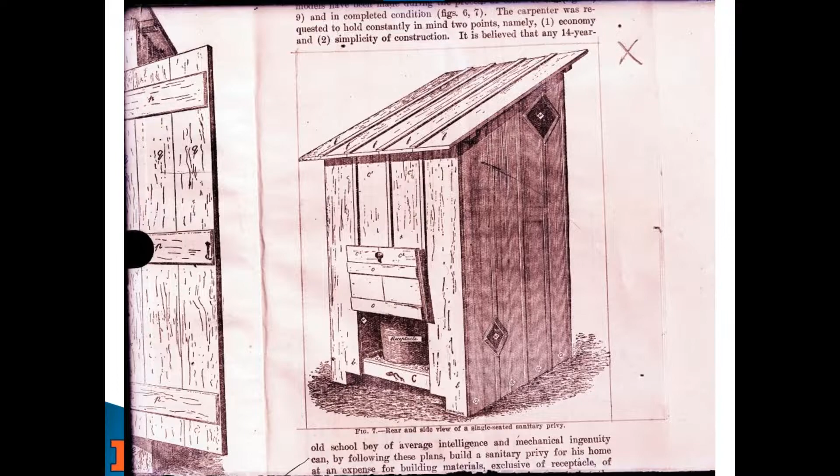So this is the state of the science for a home in a rural area back in the day. This is from the early 1910s, I believe, and it's taken out of a book and put on a glass plate to share with folks whenever our scientists went out and gave talks and things like that.

So we're going to talk about septic systems today. It's a wastewater treatment system, called an on-site system or decentralized system, and like anything else it has to be managed and maintained. They rely on natural degradation by bacteria in our body that gets into the septic tank and breaks down all the material, so it can then infiltrate through a conventional system through a septic field and percolate down into the natural groundwater system through the soil. It's further broken down there in the soil and rendered harmless, as long as we do things the right way.

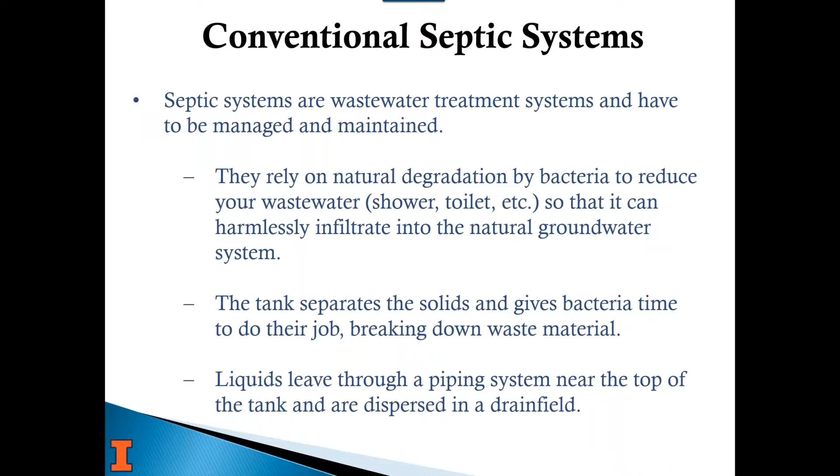So what the tank does is it separates the solids. They drop to the bottom or float on top, which also gives the bacteria time to build up and do their job by breaking down the waste. Then the water that separates can go out into the septic field. So that's really a simple mechanical system that works really well on its own. A properly taken care of system that doesn't get clogged and doesn't have chemicals and things in it can last for a very long time. Sorry for the poor image here.

I meant to change this, but this is a 2-compartment septic tank. You can see on the left, the PVC pipe that comes in from the far left goes into the first tank. All the solids drop out. There's some solids that are lighter than water, they float. Then there's a baffle to get to the second tank, and then the cleaner water, without the solids in it, goes out through the perforated pipe. As more water comes in, it pushes more water out.

Once it gets to the soil, at the soil absorption field, or leach field, it just goes into the gravel and down into the ground. It's just like other infiltration of water. When it rains or anything else, it eventually gets down into the water table or moves off site. So again, it's a really simple system.

Those solids, though, certainly build up. And that's why you have those intakes at the top, so that you can open your tank and pump it when it needs it.

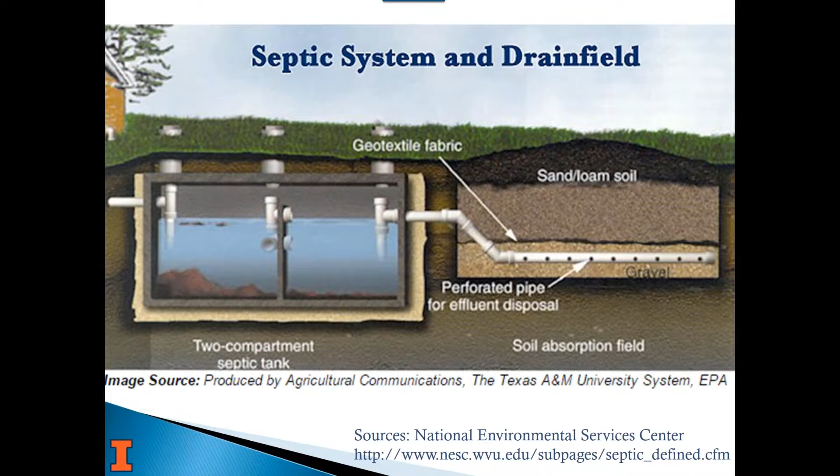Here's another diagram showing a single tank with a riser. So the sludge is on the bottom, and then it goes out into one of two kinds of absorption fields shown here. One is a trench design that's not completely sand or crushed gravel or rock, and the other shows where the whole area was excavated and filled in with coarser material that allows percolation and water to move down through it.

It says here there are over 25 million homes that have septic systems or on-site wastewater systems in the U.S. That number is probably low.

The EPA just completed some work this last year to identify private wells in the country, and we now believe there are 23 million private wells in the country. Usually we know there are more septic systems than private wells, so there's likely over 30 million septic systems.

If that's the case, without any information to back that up, there's likely to be more than what we are saying here, and that was the old number, so to speak.

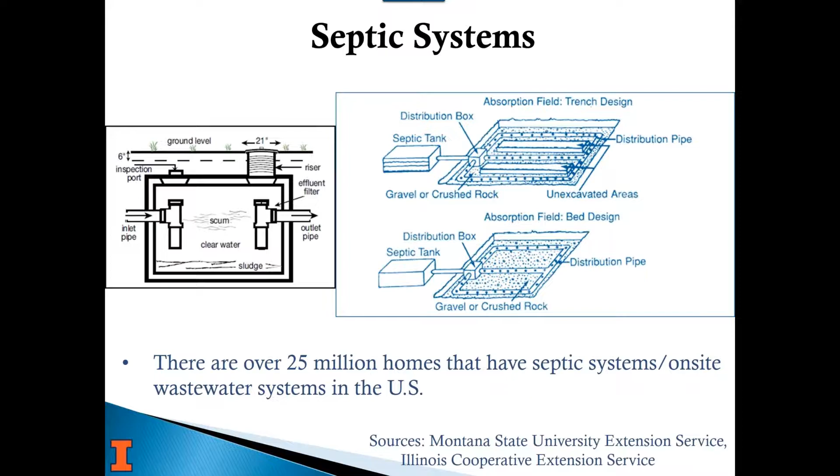Septic systems will fail if you don't pump them, and they clog up, so the water can't flow. You'll see the area around your tank or your drain field have really green grass. It may be soft when you step on it because there's water under the surface, or it may actually form a pool of water or waste in your yard, somewhere along the line between where it comes out of the house and goes into your drain field. You will notice a smell, and worst case, it can back up in your house, and that does happen.

So the thing to do is take care of your tank. I hear from people all the time saying, 'I've lived here for 25 years and we've never done anything.' My response is usually just wait, because eventually, if you're not pumping your tank, the solids are going to build up and it's going to clog up your system. There's no doubt about that.

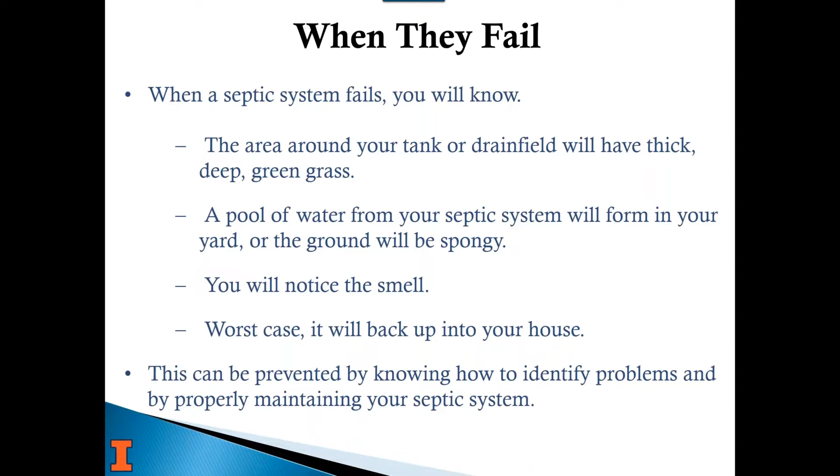As far as sizing and design, it's really based on the number of people. In Massachusetts, it's based on the number of bedrooms for a house, because homes do sell, so you can't base it just on the number of people, but in theory, the number of people that might live there. The more people, the bigger the tank, or the more frequently you have to pump. I'll show you a diagram in a minute of one example that the National Environmental Services Center provides.

Really, it's about public health protection. We have a lot of regulations in most states about where your septic system can go, which side of the home it should be on based on flow direction in the ground, all of those things, because the biggest risk is to your well.

It's no different than a feedlot for livestock. If it's too close to your well, especially if your well is shallow, there's more potential for that effluent to move to your well when you start pumping, because you're lowering the pressure of the water near your well, and that makes water flow towards it. So it's important from the public health side.

And then maintenance—many septic system owners don't know what they need to do to take care of their septic system, and hopefully we'll give you some of that information today.

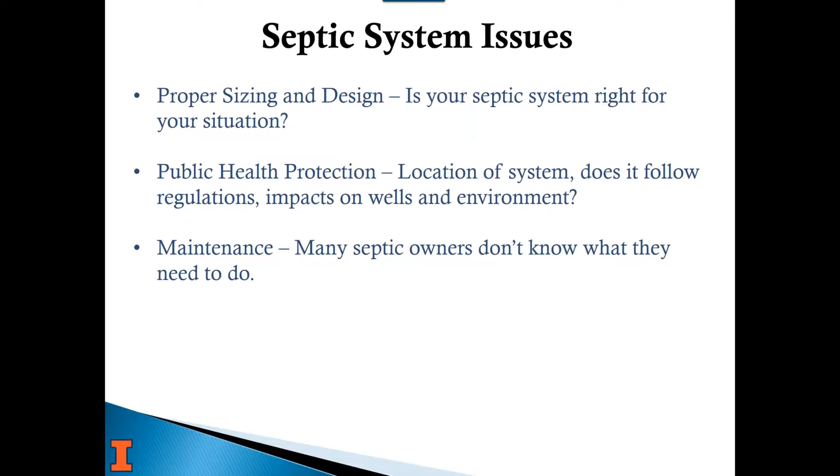As far as sizing and design, all of that matters based on how often you should pump your tank to remove the solids. Also, the size of the drain field matters depending on what kind of water use you have. It needs to be properly sized, or it won't be able to handle it. If your tank is undersized and you're putting more water through, it doesn't give bacteria time to do its job.

It's important to minimize flow into your tank so the bacteria can work on the material that's there longer. That doesn't mean you have to conserve water, but you should avoid things like a constant flow through your septic system.

As far as older systems, in the old days sometimes they just ran a line straight to a field tile or straight to a stream instead of to a leach field, and we still see those. You can be canoeing on a small creek and see pipes sticking out of a bank, which is totally illegal. There's not a lot of wherewithal with most state agencies to enforce things at that level, just because there's not enough staff, so some of those don't get taken care of.

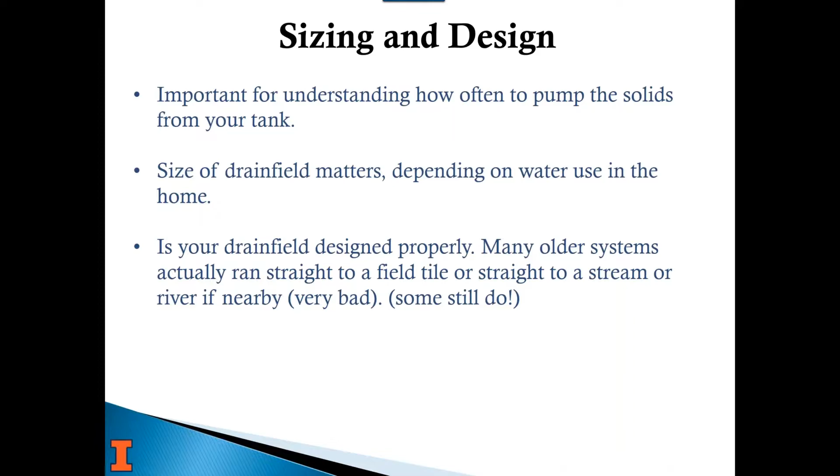As far as public health goes, if you have a straight pipe to a ditch or to the surface somewhere, it's illegal in most states, and I think it's illegal everywhere now through the US EPA. But it's also just really harmful to the environment—not only could it be a public health issue for a person, but also for the ecology and the waste in a stream, all that sort of stuff.

Understanding the groundwater flow direction is important to understanding which way things are moving from your leach field. Most of the time it's a shallow system, very shallow, so it's the water table that's also helping move water through the ground in a really shallow system.

Most of the time, the water table follows the land surface. So if you're in a subdivision that has a high end on one side and a low end near a stream, most likely flow is from the high end to the low end. If you're the house up on the hill, everything's flowing downhill from you. But if you're the last house before the stream, the shallow water table is probably flowing past all your neighbors first towards you.

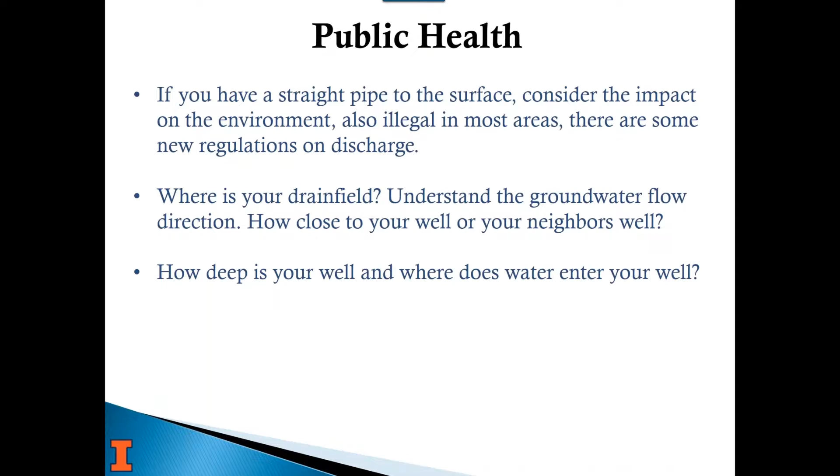So it's really important to understand what type of well you have. If it's a really shallow or a dug or bored well getting water from the shallow water table, you're probably more at risk of having contamination. These are all things you need to understand as both a septic owner and a well owner.

As far as maintenance, just like your water system and your well, your septic system has to be maintained—they will eventually fail. I can't give you a good number for that; Jim may have some more thoughts when we get to the questions. But they can last a long time. We see a lot of times where a septic system is 60 or 80 years old because they've taken care of it.

So you need to have them pumped on a schedule based on size, and you also need to be careful what you put in your septic system.

What else can happen today? We had a leak yesterday after a big rainstorm.

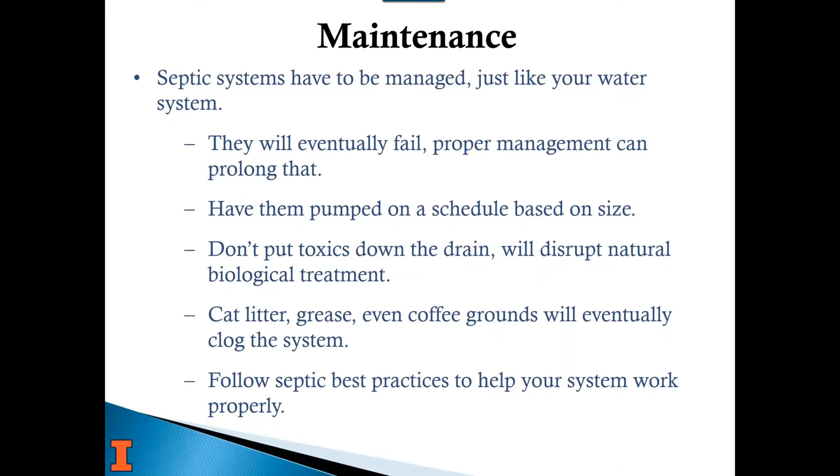So don't put toxins down the drain. If your kid is sick and takes amoxicillin, that kills bacteria—so if you throw it down your toilet, you're putting things that kill bacteria into your septic tank that is full of bacteria. You don't want to put anything in there, like paint, that will disrupt that natural biological breakdown of the material. Things like cat litter and coffee grounds will eventually clog the system, especially if you're not pumping it as you should. There are a bunch of best practices, and I'll show you some resources to help you and your system work properly so it lasts a long time.

So several people ask about a garbage disposal in their questions that they asked in advance. The common rule of thumb is you double how often you pump out your tank if you're using a garbage disposal. Those solids, like your potato peels and the ends of your carrots and all that stuff, bacteria won't break those down in a timely manner. There's too much mass there, if you will. So they're just not a good thing to have with your septic system, and they'll build up a lot faster.

So on your to-do list should be to maintain the area around your tank and drain field. A lot of questions about driving over the septic field or putting things near it, or trees. You really shouldn't have any of those things around your tank or drain field. You need to know where your tank is. There's also always a lot of questions for this webinar about how do I find my septic tank? You're not alone, a lot of people don't know where they're at. Maybe the people you bought the house from didn't know where it was at either.

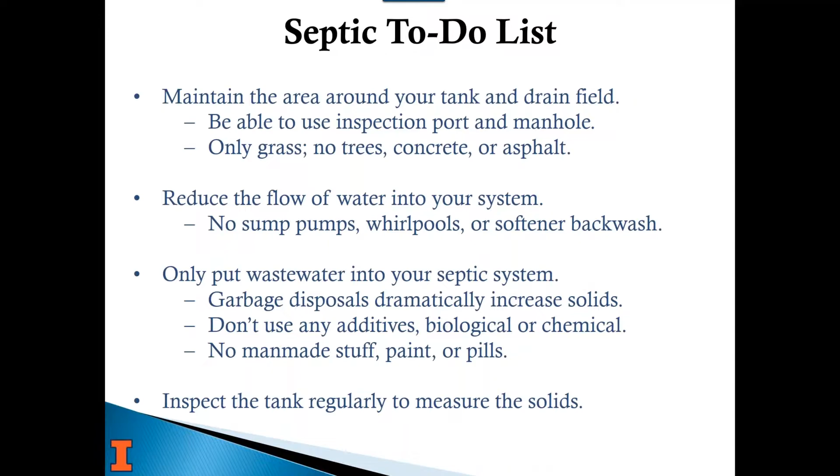You can also inspect your tank regularly to measure solids, or have somebody do it. If you don't know where your tank is and you have a septic person come out and find your tank, have them measure the amount of solids. I think the rule of thumb is around 60% you want to pump it. So you can have them come out and measure the solids and maybe pump it then, and then have them come back in a year and measure the solids again. Then you'll get an idea of how quickly it's filling up, and you'll know how often - because you may not know how large your tank is without excavating around it and all that stuff. So if they can't really tell, that's one good way to learn how often it should be pumped.

So one of the best resources out there is provided by US EPA. If you just go to epa.gov/septic, they have a lot of material available on septic systems, decentralized and on-site systems. So, just so you understand the difference, a centralized wastewater system is your community wastewater plant, where everybody's homes go to a sanitary sewer, which ends up in a plant where they treat the water and then discharge it. These systems may not just be for one home. There's systems called cluster systems that may be for one block, but a lot of times they're for an individual home or they're in a rural area, and those are all considered decentralized or on-site systems. It means they're taken care of locally - they don't have a piping system for the entire community that goes to one place where they treat it all together. So there's a lot of different kinds of septic systems or on-site treatment systems, depending on your situation. The most common type is a conventional system.

So what we're going to do is go through some of the pages on the EPA site, just so you know where all the information is, because this is really a good resource. There's several manuals listed here, and then I'll also talk about a few other resources as well, like NOWRA and NESC, National Environmental Services Center. So if you click down here under septic systems information, it takes you to learn about septic systems, and there's a lot of places you can go from here. If I click on SepticSmart Homeowners, which EPA has a program called SepticSmart, and I probably forgot to show that.

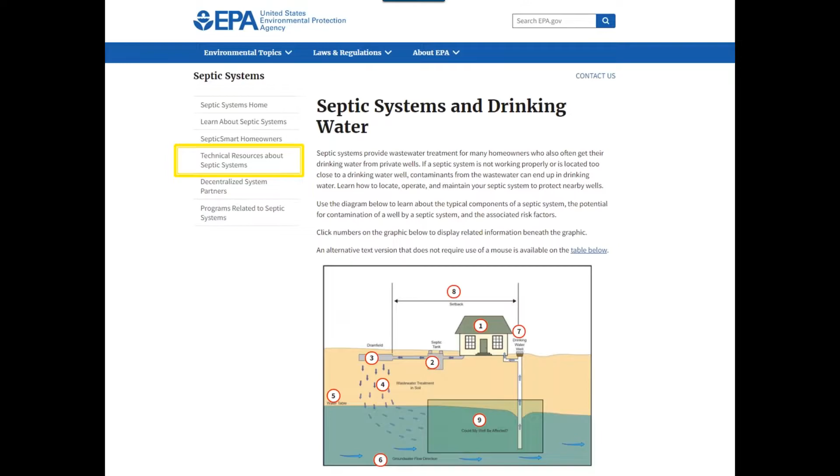Some folks live in areas where they may have to have a specialized type of system, either because the aquifers are right at the surface - that could be bedrock or sand. So a conventional system could potentially contaminate an aquifer, or they're discharging waste that's too high in certain things. So you may have a system that removes nitrogen, basically doing centralized treatment like a wastewater plant does before it's discharged. There are a lot of resources here and technical information about those advanced systems.

I know we had at least one or two questions today from folks who asked, how can I optimize my septic so that I'm putting water out there that's less harmful to the environment? One option would be one of these more advanced decentralized units. So when you click on that...

States approve different kinds of technologies. If you look through this list as you scroll through, you can find stuff for your state. Every state regulates things differently, just like they do for wells. So it's really important that you look at what is going on in your area, especially if you're putting in a new system. Here's just a couple examples.

This is Idaho's page. They have a lot of information specific for Idaho, which is great. And Massachusetts - they have probably some of the most aggressive wastewater rules in the country, and they have a great website that provides a lot of information.

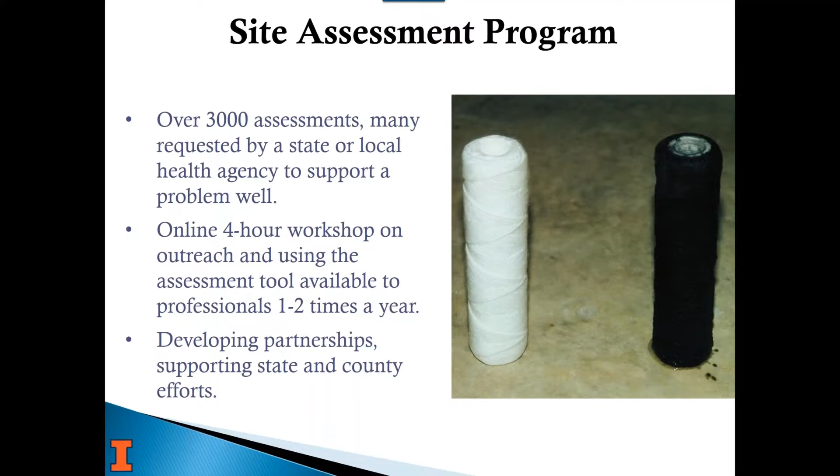They can provide a lot of resources. They can come to meetings and give presentations. They can help set up meetings for other experts to come in, all those sorts of things.

So I also want to talk a little bit about the private well class, since that's the program here that we manage and is the reason why we're doing this webinar today. It's 10 lessons, self-paced. You sign up on privatewellclass.org. It's all free. And once you sign up, you'll get a lesson emailed to you.

It comes once a week, a PDF, for 10 weeks. You're on your own to read it. And there's a lot of resources behind it. But what it's meant to be is a start to finish course.

There's a Spanish version of the entire class, and you can get to that from our English page. Even all the figures and everything else in the class lessons, and there's about 15 of the videos that have been converted, so they're all available if you're in an area where there's a lot of native Spanish speakers who would prefer to take the class that way.

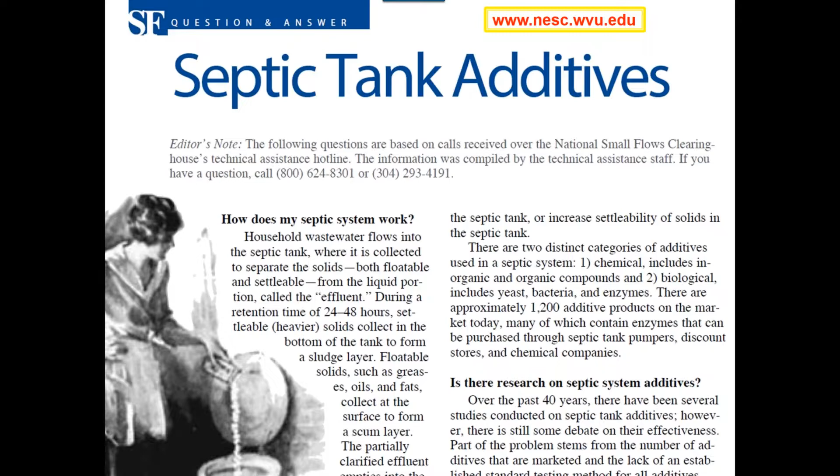There's a document I showed earlier when I was talking about NESC, where I highlighted septic tank additives. I recommend you take a look at this on NESC's website. If you just Google septic tank additives, I'm pretty sure it'll show up, but you can get to it from NESC's website pretty simply. If you can't find it, email us, we'll get you a copy. They did some work and looked into it, and basically there's no real advantage to any of those additives, and some of them are expensive, so they're costing you money.

I bet there were 30 questions asking how long a septic tank or septic system lasts. What's your experience? Well, the system itself, on average I've seen them last 15 to 20 years, though some go 30 to 50. It's really about how you maintain them. The tank itself, concrete, it's not really about the environment around it, but more about how good the concrete tank itself was. The field usually averages 15 to 20 years, but again, I've seen them last a lot longer.

As far as if you're not using it regularly, this person said they're using it infrequently, 85 days a year, which is still a fair amount. How often should it be pumped?

It's almost a catch-22, because if you're talking about a seasonal cottage you're using during the summer, you're putting no flow into it all winter, which gives it no food, no heat, no new water. Consider it a biological thing, we want to continuously keep it warm and feed it, even during the winter. Flushing your toilets brings warmth in, the biological activity warms it up. If it's a seasonal place and you're not adding any of that in winter, I would almost say pump it before you close it out for the year. Even though you aren't putting as much flow into it, you're also interrupting the biological processes, so you're really breaking down the processes that are breaking down your waste.

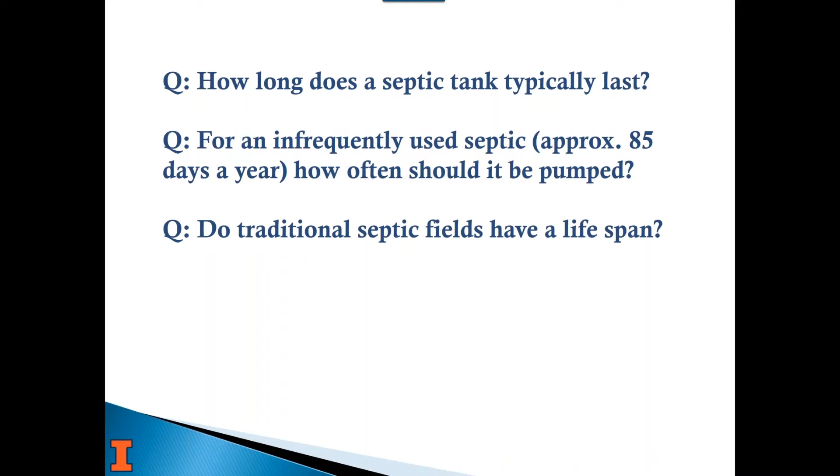People in my neighborhood plant trees very near their septic fields and seem to have no issues. And I paraphrased several of these because they were really long. But what would you suggest for planting trees near a septic field? I wouldn't. Ideally, it should be a grass field used for passive recreation, if you will.

The roots of those trees are going to get into the leach field. They could clog it. But at the same time, when I was on vacation down in the Virgin Islands, they told me that they planted their fruit trees and citrus trees on their leach field because that's where the water was. So, you know, different places don't get enough water, there might be a way that they actually sustain it. But here in Massachusetts and around here, we don't suggest anything but a lawn, if you will, be over a septic system, unless it's some sort of advanced thing that has venting that allows for like a concrete parking lot. But that's only with advanced systems, if you will, extra venting and whatnot.

And this also, I paraphrased, and hopefully I did it justice: why can't I dig out my old drain field and bring in sand and fill to create a new one? So their question really was, if you're to dig a basement that deep and just replace all the material -- and the point of this, it's not a mound, but actually just basically replace everything where the drain field was and put in a new one, because the alternate location has a bunch of trees that they have left.

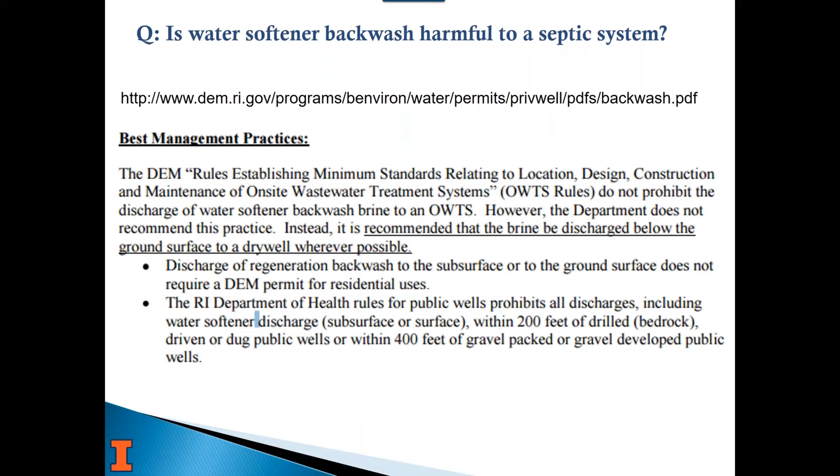That said, there's been a lot of work done with the Water Quality Association and with NOWRA. On NOWRA's website, under that same homeowner page I showed where there's a lot of resources available, there's 8 or 10 numbered bullets that explain a lot more detail about water softening and the best way to do that if you're going to.

Some folks have no issues, but others certainly do. So it's kind of a tough call, some people say it's okay, some say it isn't. I don't know for certain, so this is a guidance for folks to use, and I'd refer to it unless the state has specific rules, and some do. So anything else on softeners, Jim, that you've learned over the years?

Yeah, this is one of those gray areas, if you will. Here in Massachusetts, any backwash from any kind of treatment system other than an RO point of use isn't allowed, and it's an automatic failure under a Title V inspection program. So I would resort to at least the state or county law on what's going on.

But it is definitely one of those areas I see a lot doing private well assessments. One of the things to take a look at is where the backwash goes to the treatment system, and at least advise them that if you're looking to sell your property and need a Title V, might as well move that now before you pay someone to come back just to make sure something was moved. There's a number of states that don't allow it at all.

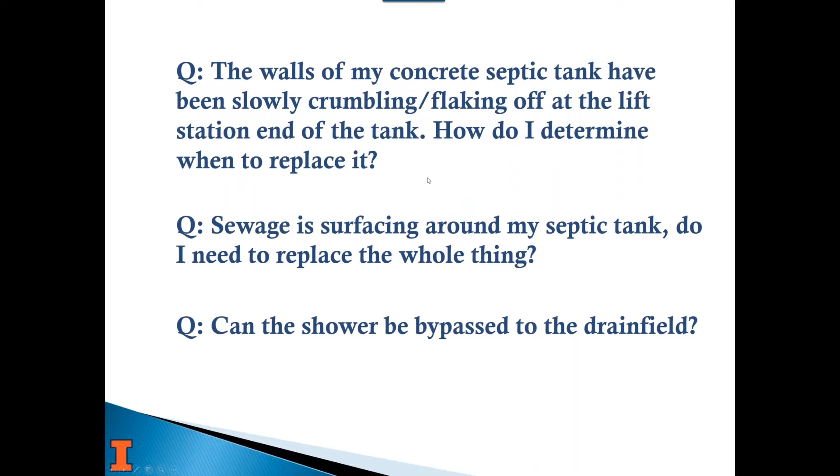One of the things they look for too is your laundry system. Even that has to be tied in. A lot of people put that into a dry well. I get it. A lot of people do gray water too, collecting that water and using it for irrigation of their yard or something.

What have you found to be the most common causes of premature failures? Bad install. Whether it's too far into the groundwater, or wrong gravel or sand, whatever it might be—bad workmanship. That's a problem that can be fixed or should be prevented. It's preventable, I guess, is the way to say it. There's a lot of safeguards, but at the same time, you're only as good as the installer and what they're doing from day to day.

So these folks live in a 130-year-old house, and they've been there 39 years. Twice in that time, they've had sewage standing in the field west of their house, with different people each time hired to find and detect the septic tank. They couldn't find it. So is it possible they only have a drain field? If so, what should they do about this?

Yeah, definitely. I'm sure it's a 130-year-old house, so probably there is no septic tank or drain field. It might even just be a cesspool—basically just a pipe going into a hole in the ground, for all intents and purposes, almost just like a dug well.

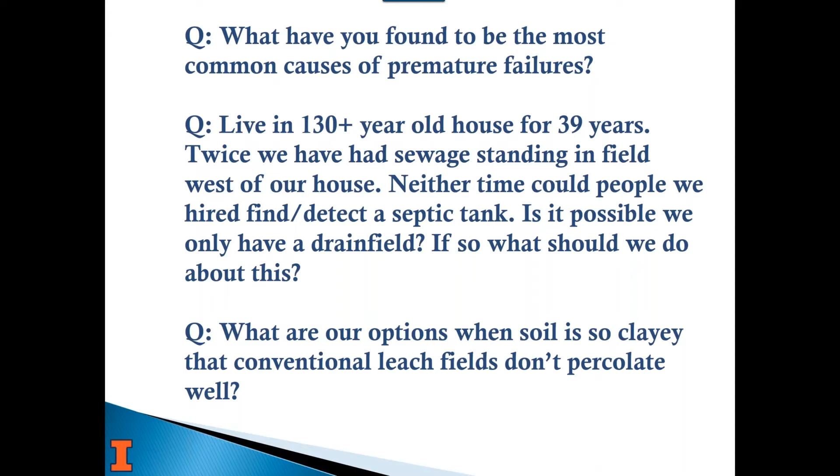What are the common restrictions which do not allow for the placement of a sand mound system? It's usually common restrictions that make you put in a sand mound system. Most common thing is not enough groundwater depth here in Massachusetts, or just unsuitable soil, because usually you don't have enough naturally occurring stuff, so we have to build it up to get that 4 feet.

Does 4 feet really work? Yeah, 4 feet from the highest groundwater table - we do what's called a deep test and perk, and from there find the highest groundwater table based on the redoximorphic features of the soil. From there it's 4 feet up, and we size the system based on the perk rate. Down at the Cape, a lot of them are 5 or 6 feet - they get that extra treatment because the soils are so sandy the water goes through quickly, so you want that extra foot to get more treatment. It's a sole source aquifer down there too, basically one big sandbar left by the glaciers way back when.

Okay, so should an electric or cable TV line be buried over the top or under a septic field?

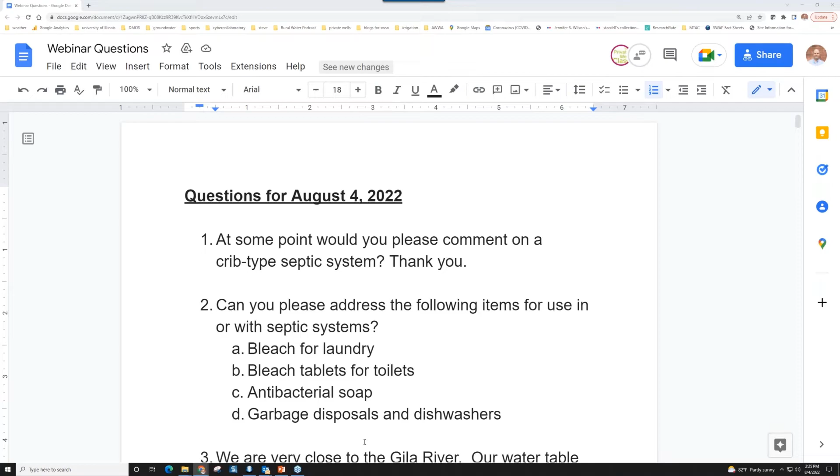Okay, so can you please address the following items for use in or with septic systems? I guess the question is, all of these things end up in septic systems, so is there any best practices there? We already talked about garbage disposals, but as far as bleach for laundry, my understanding is if you're only doing that once or twice a week, it's not enough to kill the bacteria in your septic tank. But any other thoughts on those things?

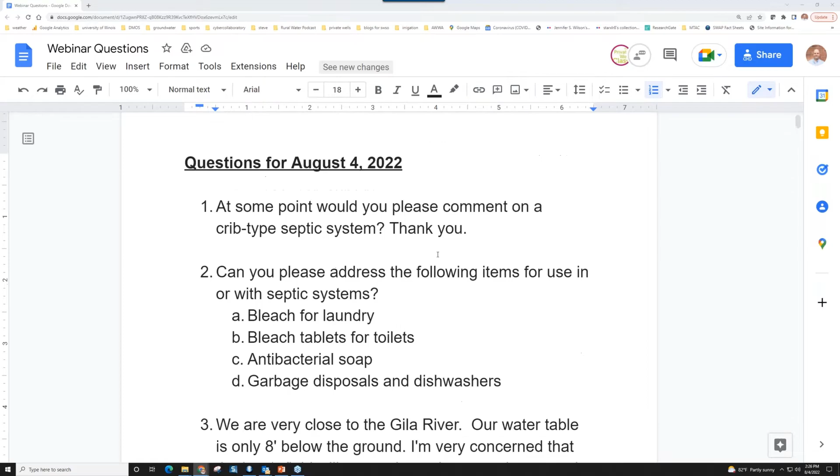Yeah, I would say it's going to be definitely diluted. I can't imagine you're going to put a ton of bleach in your laundry, just enough to whiten it. Bleach tablets at toilets, that's something that's a choice, if you will. You're adding more bleach into the system, not exactly needed. Antibacterial soap, again, it's very small. You're washing your hands, diluting it. But ideally, you want to limit it as much as possible. But we still have to use certain things for our life, if you will.

Actually, bleach is not as bad as something like quaternary ammonia. I'd rather you dump bleach down there, which becomes ineffective after it kills what it needs to kill. Quaternary ammonia just keeps killing. Bleach doesn't—it kind of peters out after the free chlorine is eaten up. So if you're going to put some sort of antibacterial down there, bleach is probably better than quaternary ammonia, which will just keep killing.

Okay, so I looked up crib septic system, and it says a crib septic system is a survival man version of a septic tank—a mini log cabin buried underground to which your household plumbing terminates. There's an image here, and there's even YouTube videos for how to do this on your own. Basically you're digging a square, say 6x6 log cabin underground, put a roof on it, and run your line into it.

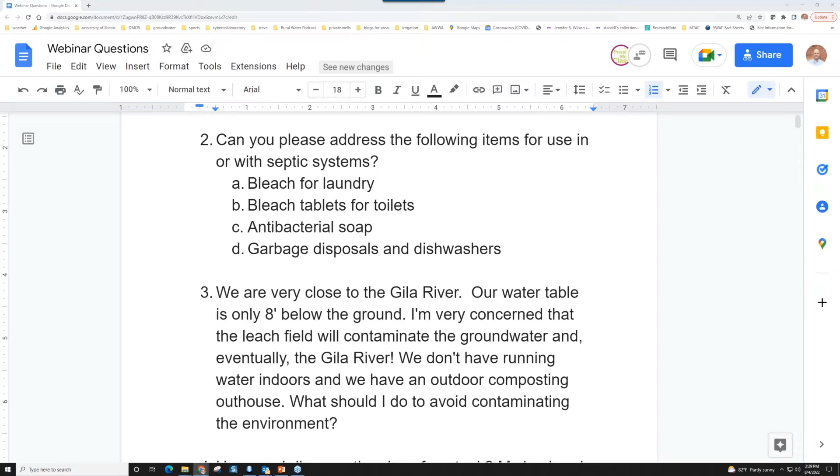Yeah, that's basically what they're showing here—a crib septic system, and it's by someone who is off the grid in Alaska. So it probably wouldn't meet most states' code. No, definitely not here in Massachusetts. We just add composting toilets for the Appalachian Trail, but that's kind of about it for that kind of stuff here.

Okay, so we're very close to the Gila River. I think this is in Arizona. Our water table is only 8 feet below ground. I'm very concerned the leach field will contaminate groundwater and eventually the river. We don't have running water indoors, we have an outdoor composting outhouse. What should I do to avoid contaminating the environment?

Hmm. 8 feet below ground, that's a long way. But Arizona is also sandy. It doesn't seem like it's some sort of issue with outdoor composting. I don't know—8 feet is a good distance, but I don't know about the rest of the environment there in Arizona. Yeah, we probably need a little more detail.

But if it's just a single home, when you say very close—the amount, yeah, I don't think that you would cause noticeable contamination of the river from your one system, especially if it has to go any distance through the ground. It's not like there's solids getting in there or anything else—it's mixing and being diluted. And when it hits the water table, I don't think it would be a significant contribution to anything.

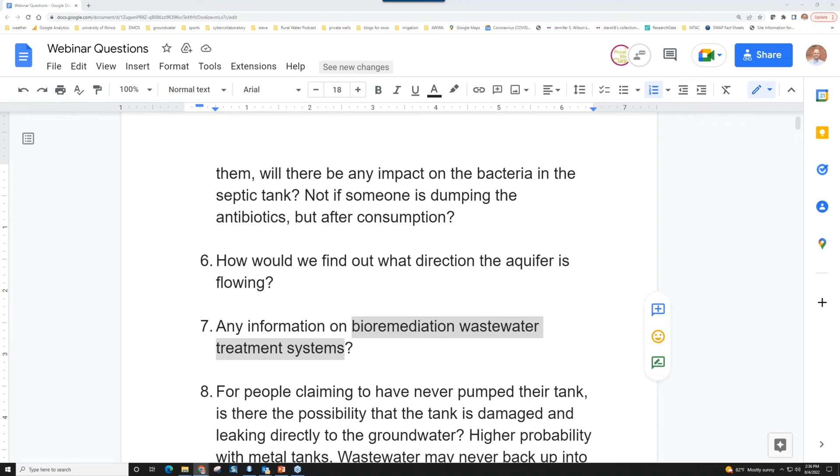Any information on bioremediation wastewater treatment systems? I'm probably another term that they're probably meaning, but is bioremediation more like further treatment, because there's a problem in the biological area, kind of like further nitrogen treatment, like I mentioned down Cape Cod, because the freshwater ponds are getting all kinds of bacteria, toxic algae outbreaks and having problems with red tides, etc. So that's what I mean.

But yeah, we do a lot of that. In Massachusetts, it actually has to be certified by the state, and there's different levels of certification on each of the technologies. But I've seen them work very great. We had to put one in for a system having nitrate issues in their drinking water well, and I've seen them actually treat the wastewater to a level that would meet drinking water standards. So they're highly effective, if that's what you mean by bioremediation.

Yeah, bioremediation for the purpose of cleaning wastewater is a process of treating wastewater with the help of naturally occurring microorganisms and other aspects of the natural environment. Yep, that's kind of what we're talking about. Basically, what these systems do is make a perfect home for the bacteria. They add a lot of oxygen in the area, give them a perfect domain for them to hang out. And then from there, there's just much more bacteria there that do much more treatment of the water and bring the nitrogen into denitrification, if you will.

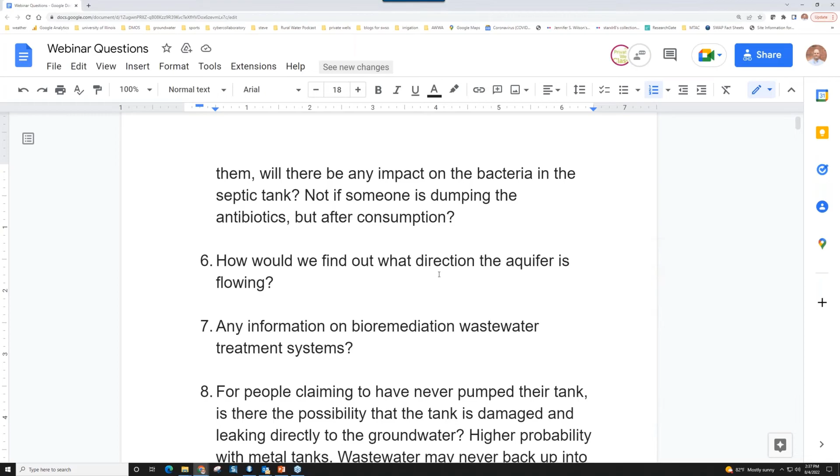For people claiming to have never pumped their tank, is there a possibility the tank is damaged and leaking directly to the groundwater? Higher probability with metal tanks - wastewater may never back up into their home, but it's still going to fill up with solids eventually. Unless it's a big tank, it's possible the tank is leaking, and like I said, the seals might go before the tank does. Metal tanks have even higher probability because they rust out quicker than concrete tanks. So there's a possibility it's just leaking on the side of the septic tank and never makes it to the D-box or leach field. But again, eventually the solids are going to take over - you'll end up with basically a box of poop, and it's going to back up into your home because there's nowhere for it to go. So eventually it's got to back up, though it depends on the size of the tank and all those things.

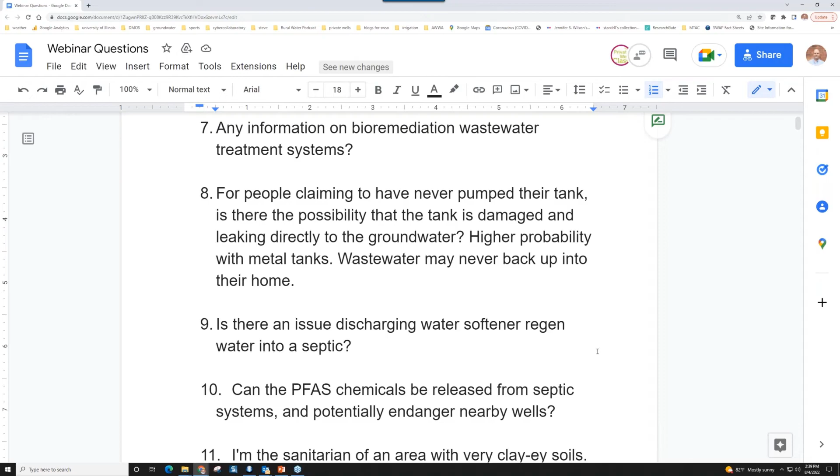Can PFAS chemicals be released from septic systems and potentially endanger nearby wells? I think we've already talked about that too. There's certainly PFAS getting into our wastewater treatment systems - it's ubiquitous. Whether it's endangering a well, when the stuff from your leach field meets the water table, it's being diluted, so it would have to be fairly concentrated. Not that we want any in the environment - I'm just saying there's potential, but there's sources of PFAS everywhere, so it's certainly possible. I guess that answers your question - I'm not sure how likely it is, but it would depend on the individual situation.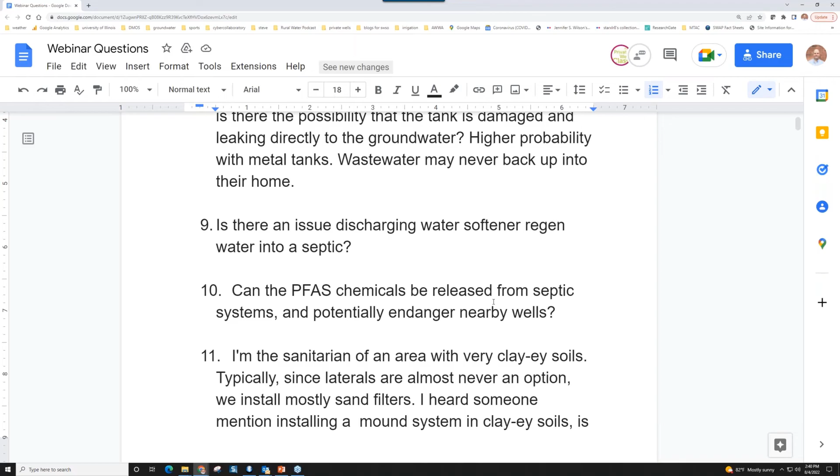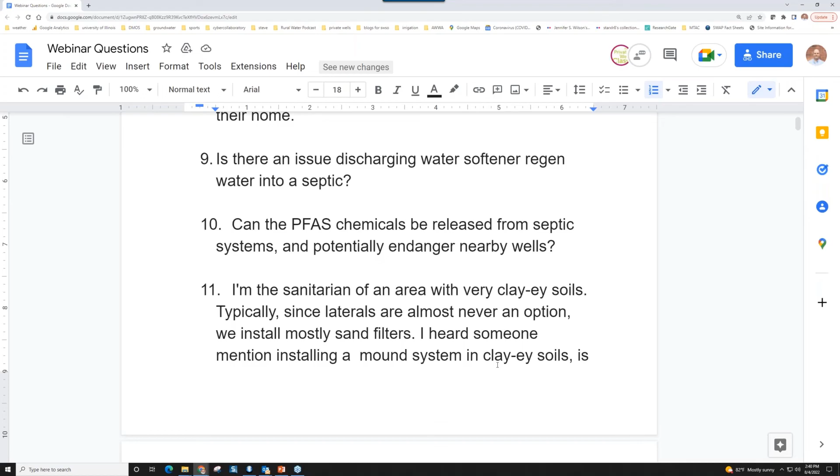I'm a sanitarian in an area of very clay soils. Since laterals are almost never an option, we install mostly sand filters. I heard someone mention installing a mound system in clay soils - is a mound better than a sand filter? Can someone explain the difference and potential pros and cons of each?

Well, the mound would be what we call Title V sand here, so it would be almost like a sand filter. If you're talking about a bottomless sand filter, that would be almost like further treatment - kind of like a denitrification type system. It's required in zone 2s or zone 1s, but I think that's what you're talking about with that kind of sand filter - we call them bottomless sand filters.

I think it's just different terminology. Where we bring in, we mound up what's called Title V sand, which is sand that meets the Title V specs.

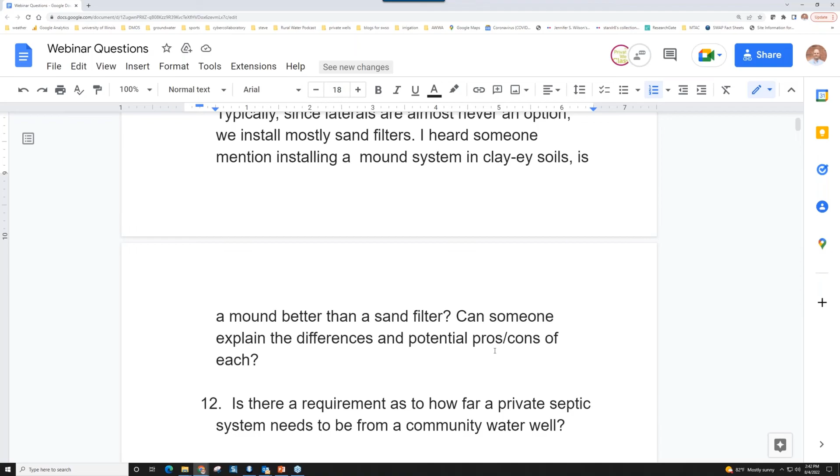But because it is a sand system, it gives it room to percolate in different ways. The bottomless sand filter would be further treatment - it would go through the sand filter and then almost be repacked and put into a leach field. So it's almost like a sand filter at the leach field, or a sand filter before it hits the leach field. They're two different approaches.

Is there a requirement as to how far a private septic system needs to be from a community water well? There most definitely is in every state. It may be a different distance and may have different rules, but each state has to meet the regs for the state as well as the Safe Drinking Water Act for every community water supply well. In most states there's a ton of rules about how close you can be to a community well for a lot of different things, but certainly for a septic system on a private property. You'd need to look at your own state code to determine that distance - I don't know what it is in Illinois, to be honest.

In Massachusetts, it's based on the pumping rate of the well itself - the more water you're drawing, the further out your zone 1 and zone 2 extend. That's a good way to do it. It's 100 feet from a private well, but it's all zone 1, zone 2 - if you're in zone 1, you can't have any septic; in zone 2, you'd have to have a denitrification type septic system.

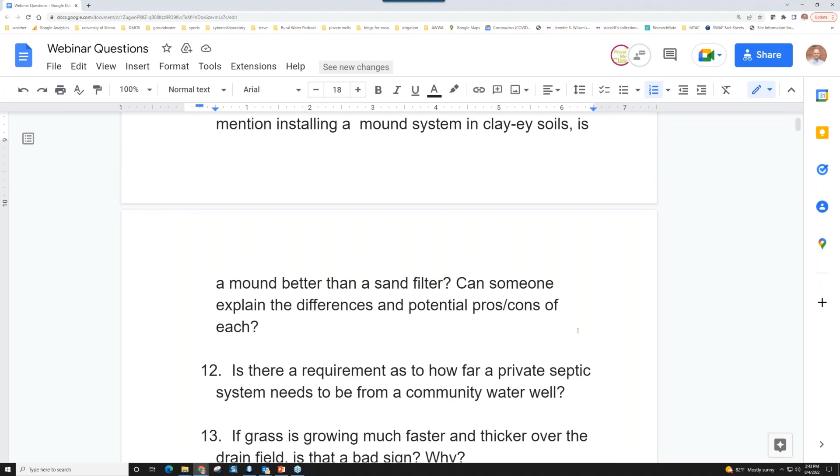If grass is growing much faster and thicker over the drain field, is that a bad sign? Usually, yes, because it's showing that wastewater is coming up. It's growing faster and quicker because it's getting moisture and a lot of nitrogen and nutrients. And if it's darker green than the rest of your lawn, then most likely the reason is because you're fertilizing it from your toilet.

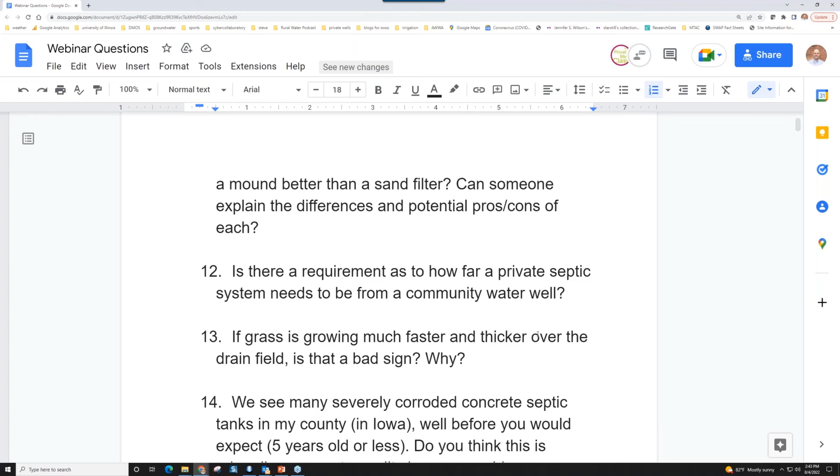We see many severely corroded concrete septic tanks in my county, well before you would expect, 5 years old or less. Do you think this is primarily a concrete quality issue, or could homeowners be adding things to their tank that is speeding up corrosion?

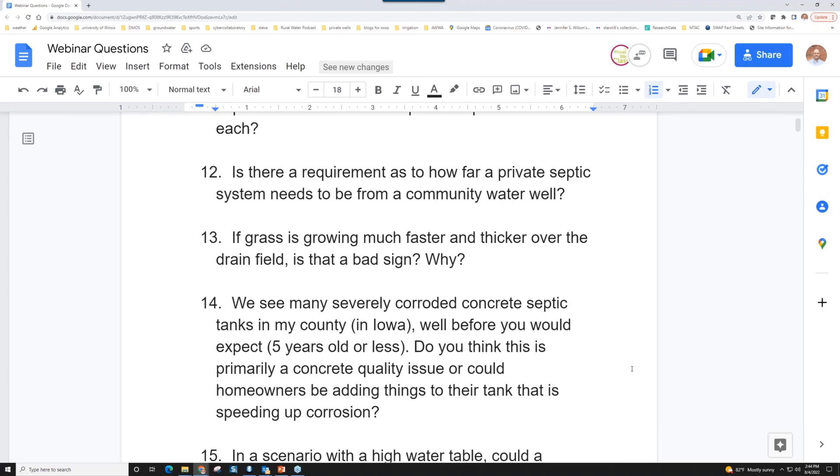Was the corrosion on the inside or the outside? If you're seeing a lot of it, I wouldn't imagine it's the people. I would say it's probably a bigger issue.

Yeah, but I know here in Massachusetts, there was a ton of homes made with substandard concrete foundations, and they're crumbling now. Different issue, but still some concrete company made the wrong mix, and 20 years down the road, people are paying the price. This is an issue in Western Mass and Connecticut mostly, and it's thousands of homes. So yeah, wow, one concrete quarry messes up the mix, and...

You might not notice for 5 years, but 5 years for a septic tank, and if you're seeing multiple, I'd say it's a bigger issue. Either you might have very acidic soil where you are, or something wrong with the concrete quarry. But if it's acidic soil, that's going to be on the outside of the tank. Now that I think about this, it has to be on the inside or you wouldn't see it. Unless... but I see in many, there's something bigger going on. No, usually, yeah.

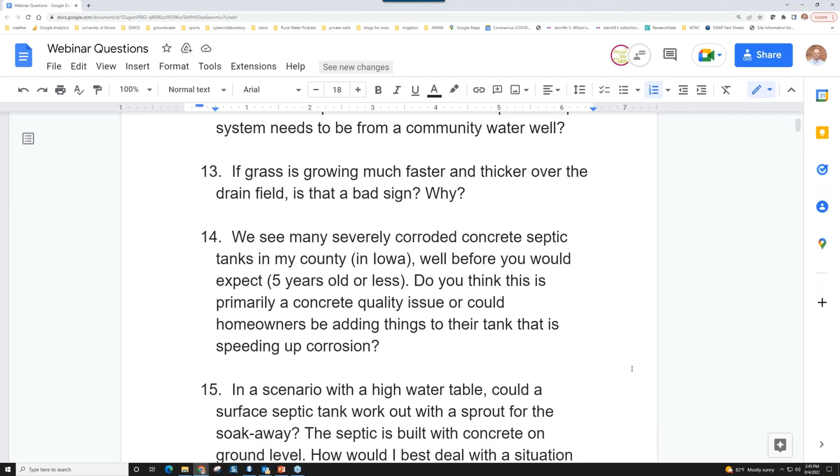In a scenario with a high water table, could a surface septic tank work out with a sprout for the soak away? The septic is built with concrete on ground level. How would I best deal with a situation where the waste flows to the soak away - which is a term I've never heard - and the matter is not getting submerged in the septic but floats and ends up in my soak away? Also, how do I deal with the soak away that is soiled in that manner?

I have no idea what he's talking about. Yeah, I don't know what that is. To me it sounds like a surface pipe, and then when it rains, it soaks away, which that's not going to work around here. No, yeah, I don't know. Oh my. Yeah, you're using terms that we're not used to seeing.

Why don't you email us and we'll see what we can find out, because I don't know how to answer that. And I might want you to send us a picture or two, because I'm not even sure who to ask.

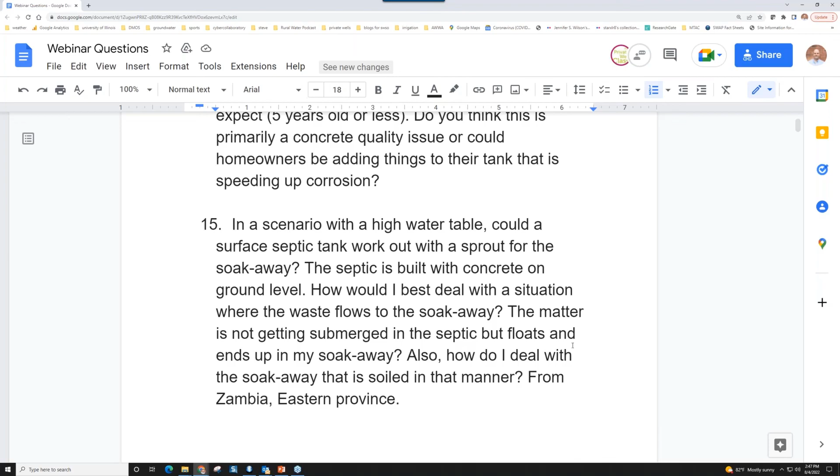Is a teaspoon or less amount of coffee grounds per day enough to harm a septic system? Remnants from a mesh coffee filter?

I wouldn't say so, no, probably not. I mean, if you dump your whole 12 cup remnants down the disposal, yeah, but no, a little here, a little there - that's what the septic tank's made for, is to collect those solids and break down some of them, and then be there when you pump out the rest. But just know you are adding solids to your tank. It's going to take a long time, a teaspoon at a time. But that's why we mentioned it, some people throw in all their grounds.